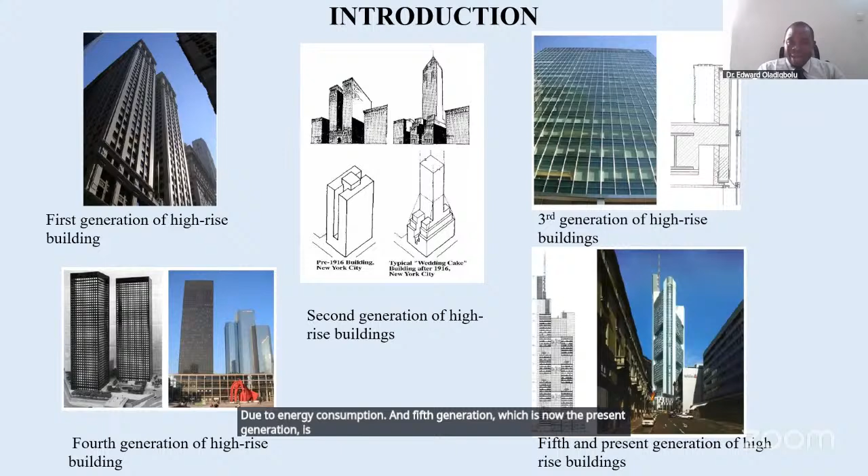Now, building performance robustness - this is very important. We start looking at buildings, analyzing the performance robustness in each building envelope. But why do we study this? To quantify the impact of uncertainty to make informed design decisions, to reduce the gap between predicted performance and operational performance, and to ensure desired performance over the building's lifespan.

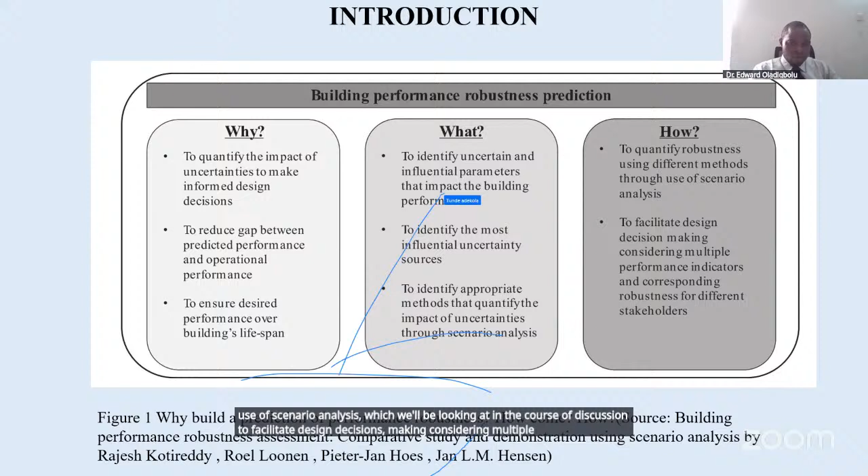But what are we actually studying? To identify uncertain and influential parameters that impact building performance, to identify the most influential uncertainty sources, and to identify appropriate methods that quantify the impact of uncertainties through scenario analysis. Then we look at how to quantify robustness using different methods through scenario analysis, which we'll examine in this discussion, to facilitate design decisions considering multiple performance indicators and corresponding robustness for different stakeholders. This is shown in a comparative study and demonstration using scenario analysis by Rajesh Kotireddy.

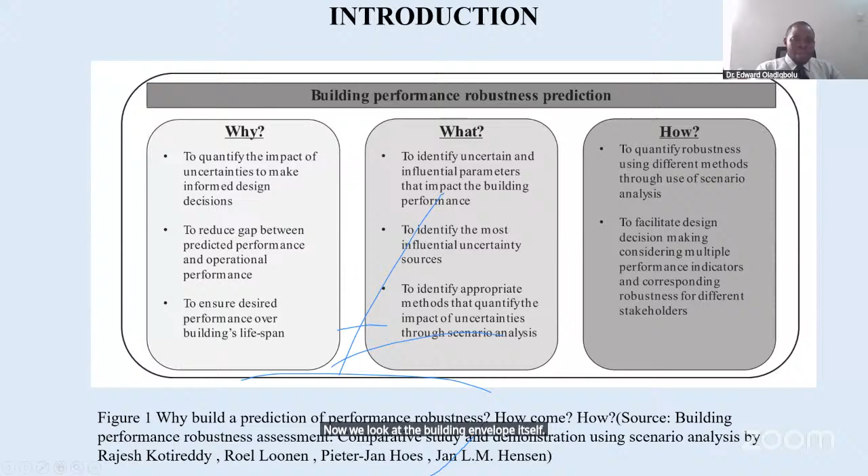Now we look at the building envelope itself. The building envelope includes facades, which interact with the outside world as a social modifier for the microclimate. It isolates spaces from environmental temperature and humidity fluctuation.

So investing in building form and enclosure is a key approach to achieving net zero energy building. These forms of building evolve over generations, and since requirements were relatively simple and change was usually very slow, the design, materials, and construction techniques evolved at a pace dictated by matching needs and available resources.

Now let's look at these five generations and how their relevance has moved from the first to the fifth generation. The first generation is the first batch of tall buildings globally, with the first tall building in 1885. The objectives were mainly compact shape, large volume, high levels, thermal mass facade. Typical energy performance characteristics show low percentage facade transparency, with heating and elevators as the main consumers of energy.

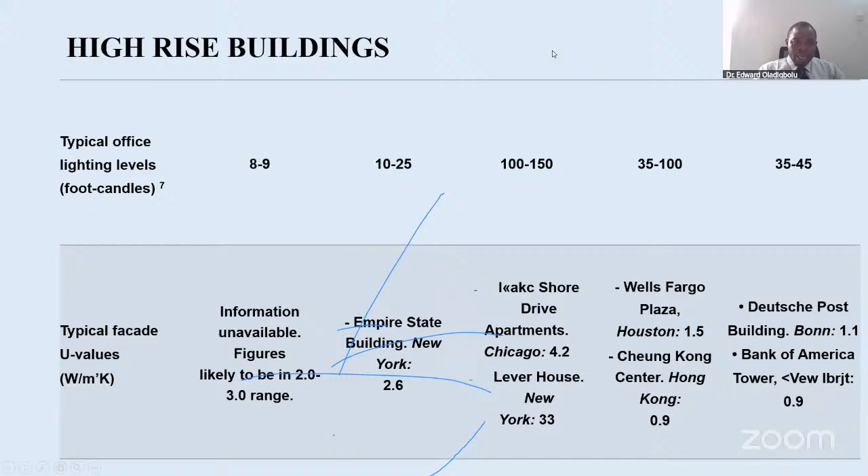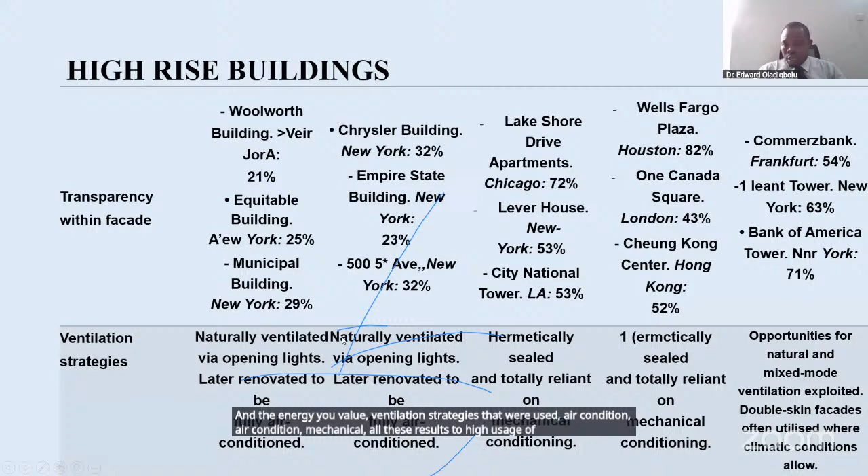You can see the typical office lighting levels for each of those generations, the facade U value, and ventilation strategies used: air conditioning, mechanical systems, all resulting in high usage of energy, mixed mode, exploited double skin facades, and various other conditions.

Now look at high-rise buildings in Nigeria. There are so many high-rise buildings in Nigeria, particularly in Lagos State, but these are the highlighted ones. The Great Nigeria House was built in 1979, which falls into that fourth generation, where energy demand became very critical and buildings are harnessing ways to reduce energy consumption.

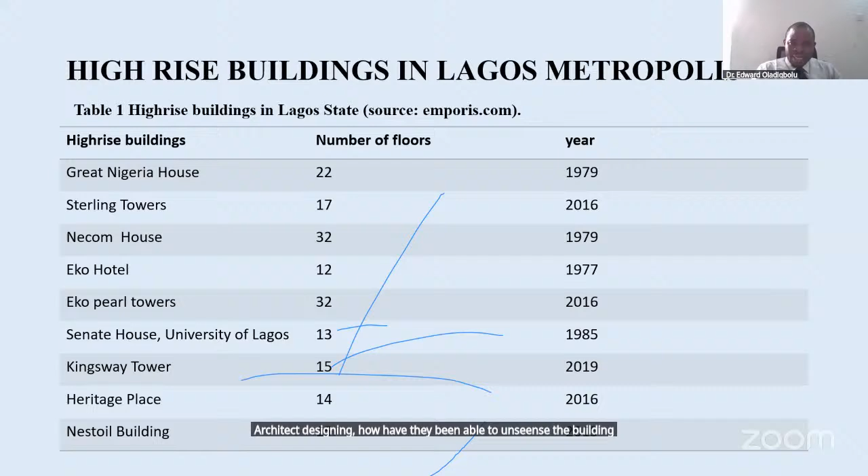How have they been able to harness the building envelope to curb or mitigate the energy demanded by these buildings? So we need to look at the energy flow path in buildings. Before you can harness the energy, you need to understand how energy flows from and around that building.

Now afterwards we look at energy optimization. What are the factors that really affect building services and building energy optimization? This is grouped into the table as shown above, showing the key factors influencing energy consumption in buildings.

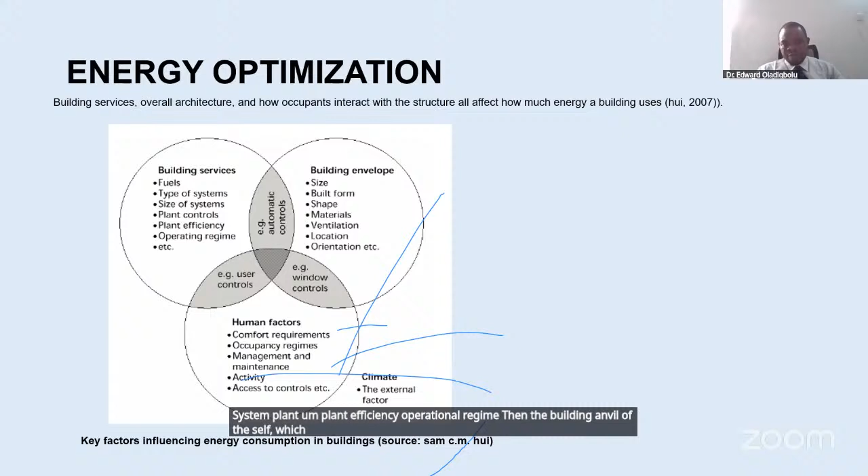These relate to the building services: the fuel, type of system, plant efficiency, operational regime. Then the building envelope itself, which looks at the size, building form, shape, materials, ventilation, location, and orientation.

Then human factors, which include comfort requirements, occupancy regimes, management and maintenance, activity, and access to controls. Then we have the external factors, which is the climate.

So we can see how these connect. The building services connect to the building envelope through automatic controls. The human factors connect to the building services through user controls. The building envelope connects to the human factors through window controls. With this, all connect together as a set to optimize the energy usage in any building.

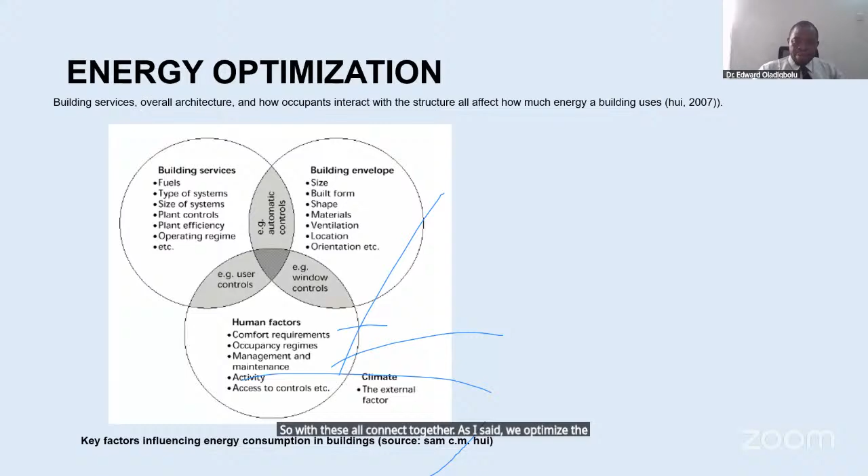Now, Mottahedi examined the key indicators for energy to understand the key variables, which include the system variables, which are on requirement: the lighting, the services, and the internal loads. Then you have the internal load schedules, internal loads, the electrical usage—whatever internally you are using in your building—and your system schedules.

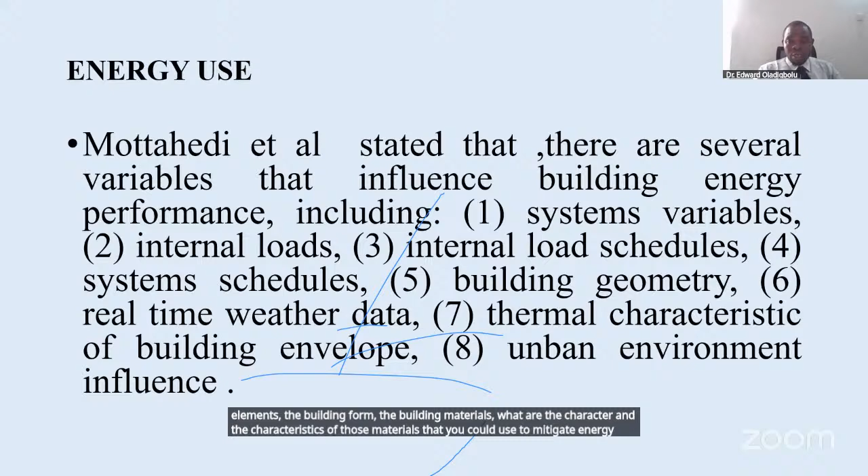You have the building geometry, then your real-time weather data, the weather of that environment, thermal characteristics of the building envelope - that's the characteristics of the elements, the building form, the building materials, and the urban environmental influence. Then we looked at that as being grouped, which has shown the same way.

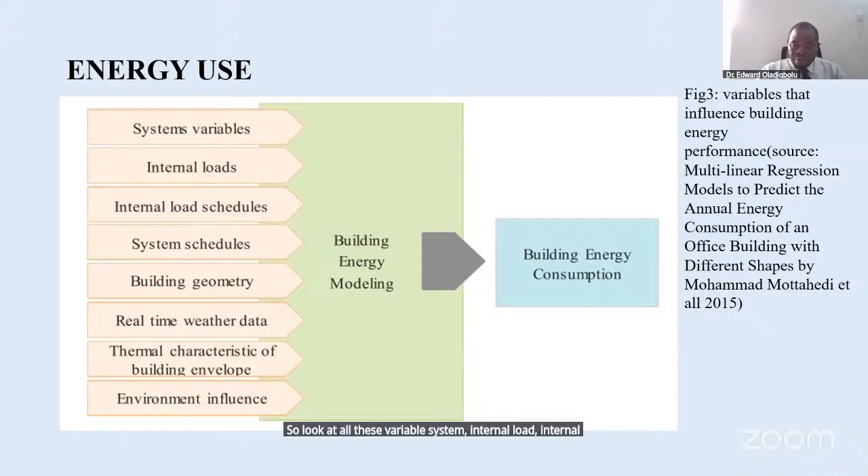So these factors can be used for what we call the shoebox model, that's the building energy modeling, because that is the best way you can identify which of these variables is actually influencing the energy consumption of the building the most. So we look at all the variable systems, internal load schedule, environmental influence, and so on and so forth.

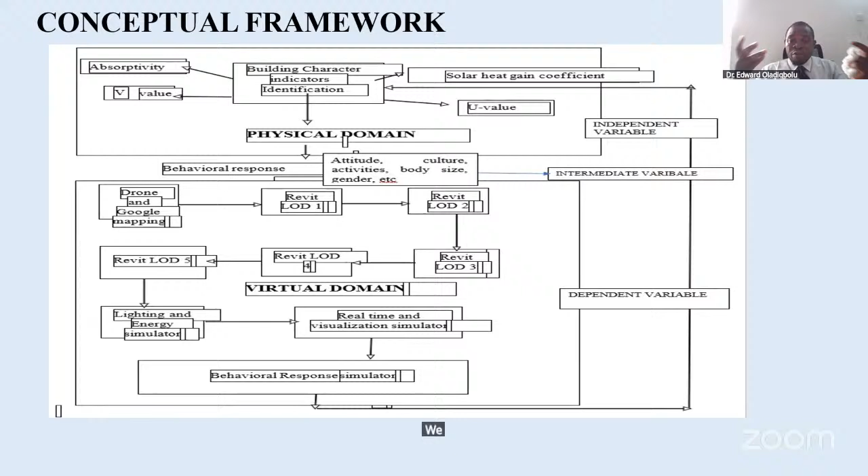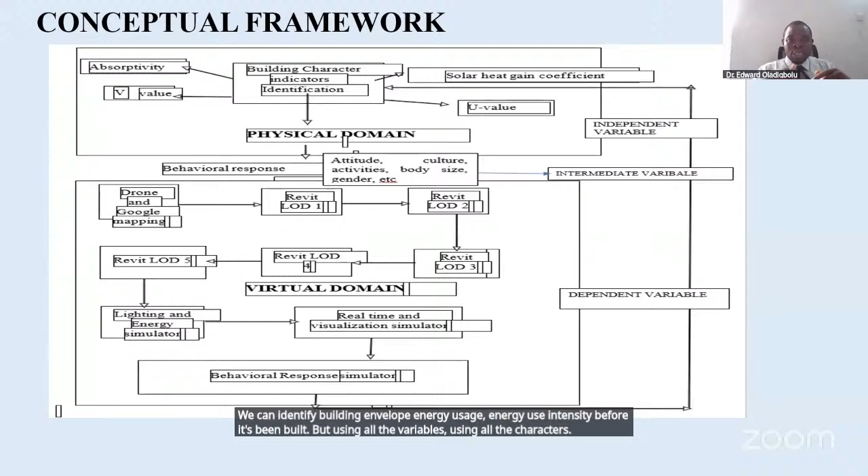So there's a framework arising for mitigating energy usage. In the conceptual framework shown above, we show the relationship between the physical domain and the virtual domain. In this way, we can mitigate energy consumption of any kind of building even before it is built. We can identify building envelope energy usage, energy use intensity before it is being built, using all the variables, all the characters, all the indicators that is being calculated into the building usage.

You can see that using it to measure different conditions, and you can use that to calculate the energy consumption, even identify the bill you are meant to pay for the building. And these practices are noted all over. In Holland, they use passive house to measure, so whatever bill they are bringing must be in conformation to what you're actually using in the building.

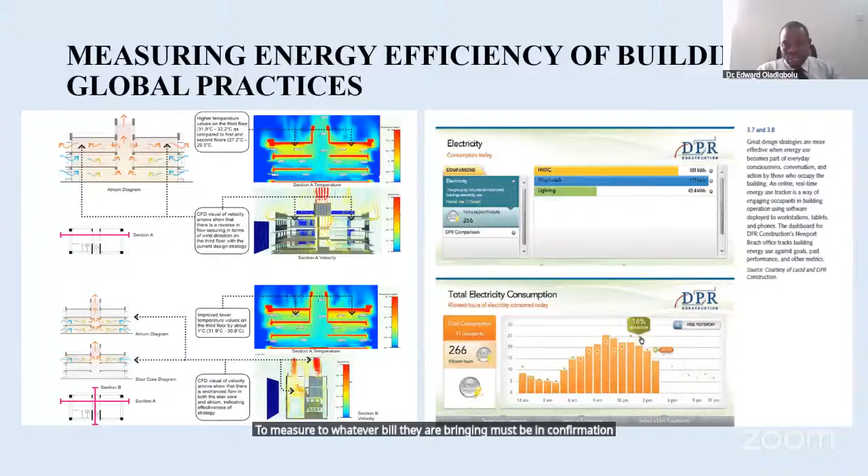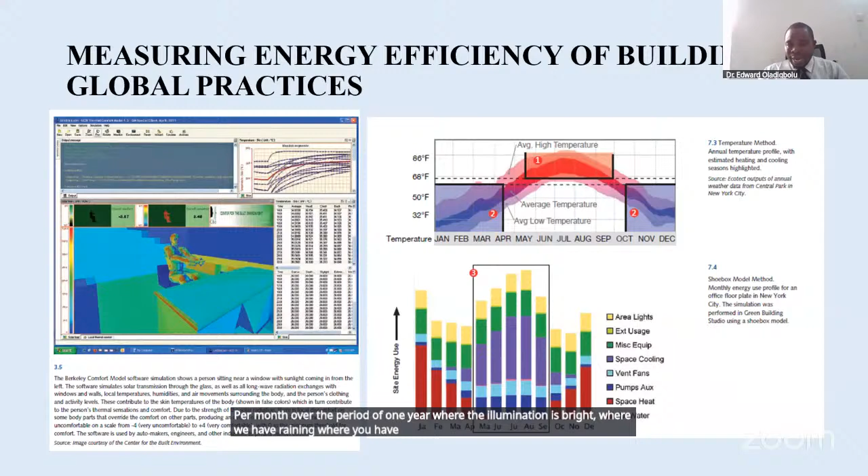You see this for measuring daylight. You have the Ecotect, you can see this Berkeley comfort model simulation. It shows the daylight factor and daylight autonomy through the spaces of several buildings. This shoebox model method shows the energy consumption of each of your spaces per month over the period of one year, where the illumination is bright, where we have raining, where you have daylight - how much energy will you use over that period of time.

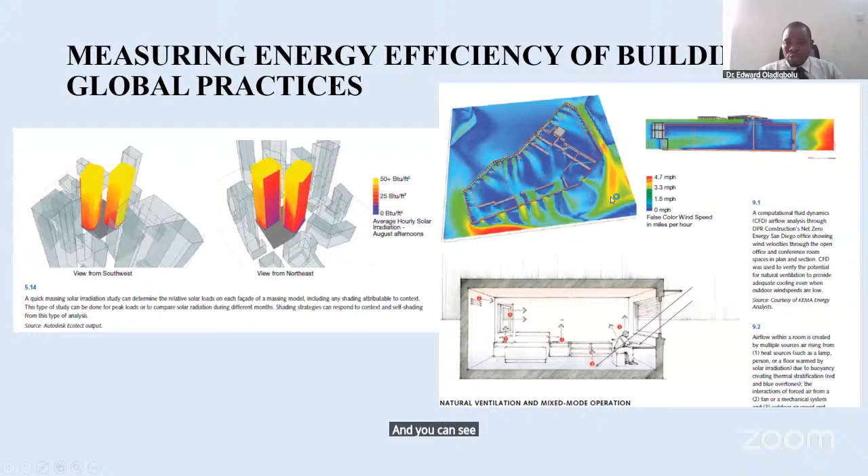So you can see more. This is to show the massing, to show the lighting performance along each of the spaces. And you can see this is simulation CFD showing the airflow within each of those spaces.

Now we have samples here in Nigeria where we calculated the energy consumption in one of the major high-rise buildings in Nigeria. Example here is the Heritage Place, it's a LEED certified building. We calculated the energy usage to see if it meets up the benchmark that has been stipulated for 2030, to meet up the SDG goal, Sustainable Development Goal. This was simulated through Revit and Insight 360.

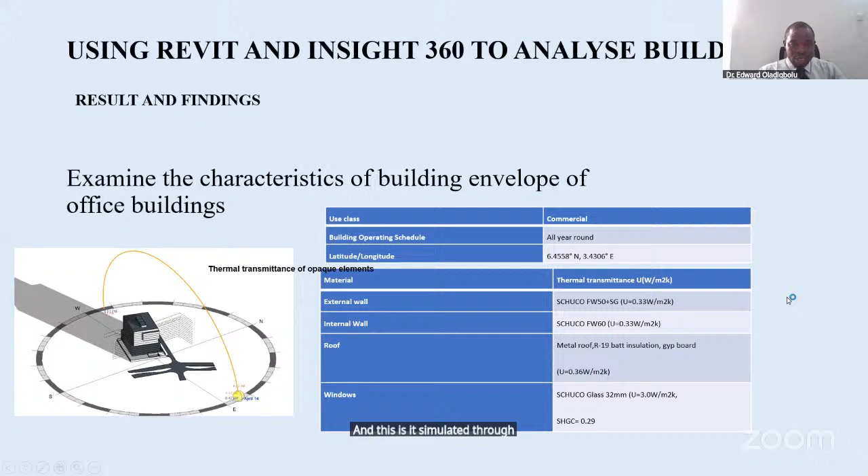And we did the same for Nestoil Building, also a LEED certified building, Heritage Place, King's Tower, and the Churchgate Building. Now these are the energy values gotten from each of that. As much as they were recognized for LEED certification, they still have some adjustments to meet up the benchmark. You can see the Architecture 2030 benchmark there.

The energy consumed after analysis through simulation is 208 kilowatt hour per meter square per year. The energy usage needs to be reduced to 110 kilowatt hour per meter square per year in order to meet up the benchmark stipulated from Architecture 2030. And to meet up ASHRAE 90.1, it must be 171 kilowatt hour per meter square per year.

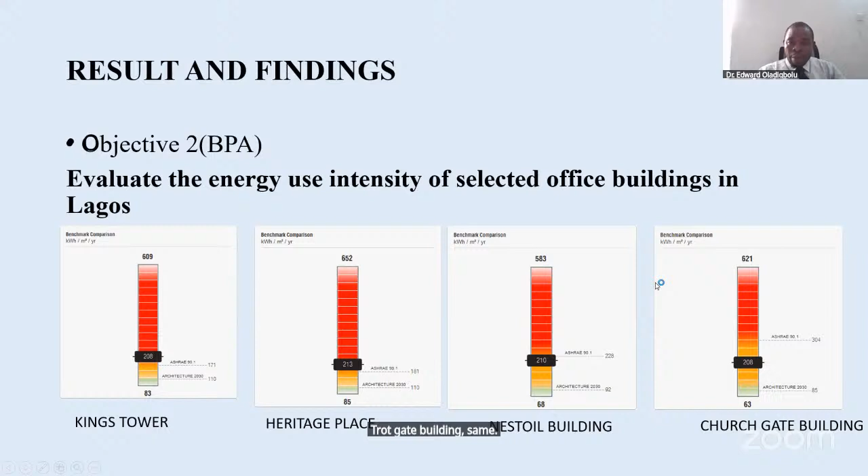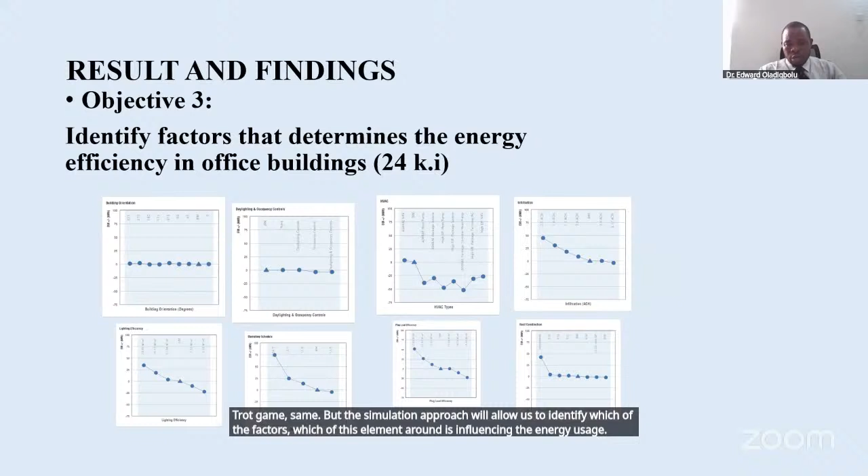And it cuts across - the Nestoil Building meets up the ASHRAE 90.1, Churchgate Building, same. But the simulation approach will allow us to identify which of the factors, which of these elements around, is influencing the energy usage. Because if you look through the typical methods of approval, of checking sustainability, it's just to see the number of windows.

But what is the lighting level? What is the daylight factor? What is the daylight autonomy? These are the things that we are more concerned about in order to achieve adequate lighting in the space, in order to reduce energy consumption.

With this simulation, you'll be able to identify each of the factors, from building orientation. You can see building orientation has no much effect because most of these are open offices with open glazed windows. There's adequate daylight autonomy through each of the spaces.

But the HVAC system, the infiltration through the different materials, is important. The materials used based on their convective and conductive properties affect the heat exchange from outside space to internal space. You can see the lighting efficiency.

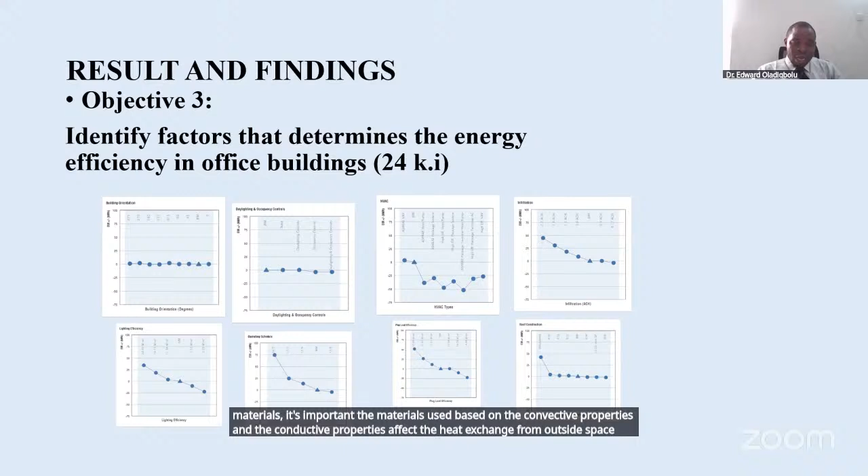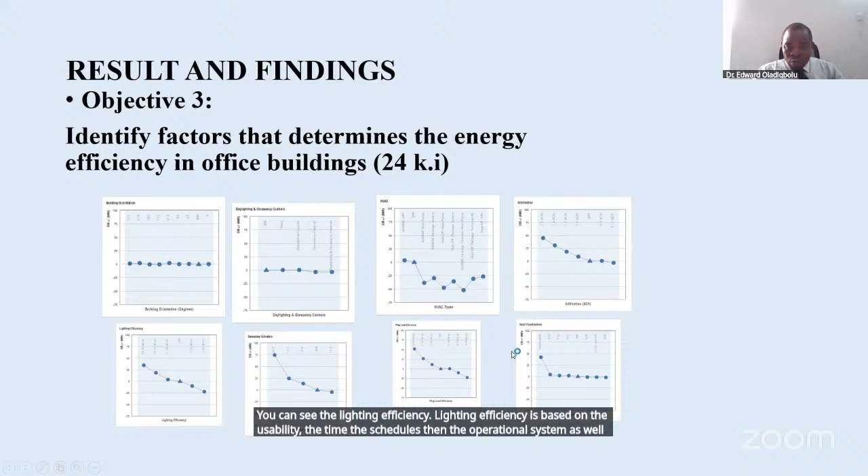Lighting efficiency is based on the usability, the time, the schedules, and the operational system as well. We also look at the roof orientation and roof construction, then the relationship between the building envelope and energy efficiency, looking at each of the facade elements and how they affect energy consumption. Each of them is indicated as shown above.

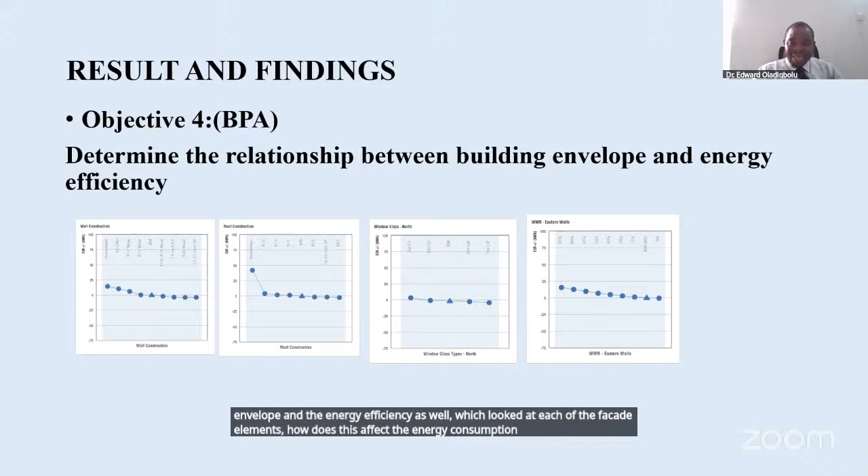Now, this process shows how you can go through the simulation process to achieve an energy efficient building. Firstly, by measuring the building if it has already been constructed, plotting it using GPS mapping to know the latitude and longitude, and allocating it to a weather station.

Then you develop the building information model. The building information model shows all the details plotted accordingly. There are many building information modeling softwares, such as Revit, Vectorworks, SketchUp, ArchiCAD, and so on. From there, you move into building performance analysis, the BPA, where you do the energy mass model, the shoebox modeling.

You have the energy assessment through Insight. There are others: Green Building Studio, Edge, Passive House, Habitat, Energy Plus, and so on.

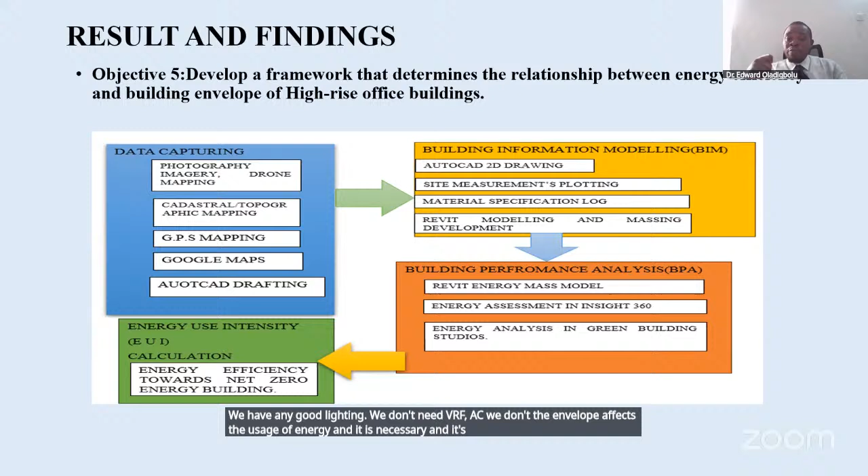From this, you can identify the energy consumption at the end of the day for each building and identify which elements are affecting its energy consumption. So you wouldn't randomly suggest, just by looking at it, that there's adequate ventilation, adequate lighting, or that we don't need VRF AC. The envelope affects energy usage, and it's necessary to identify the elements influencing energy consumption before addressing the mechanical aspect of the building.

In conclusion, energy benchmarking is pivotal to achieving sustainable development. Lagos, as a metropolis, has a high concentration of high-rise buildings, and energy use intensity needs to be minimized to contain global warming and urban heat island effects. Simulation serves as a pivotal method for assessing energy use of large buildings. Building envelope is very imperative in reducing energy use intensity of high-rise buildings, or any building in particular.

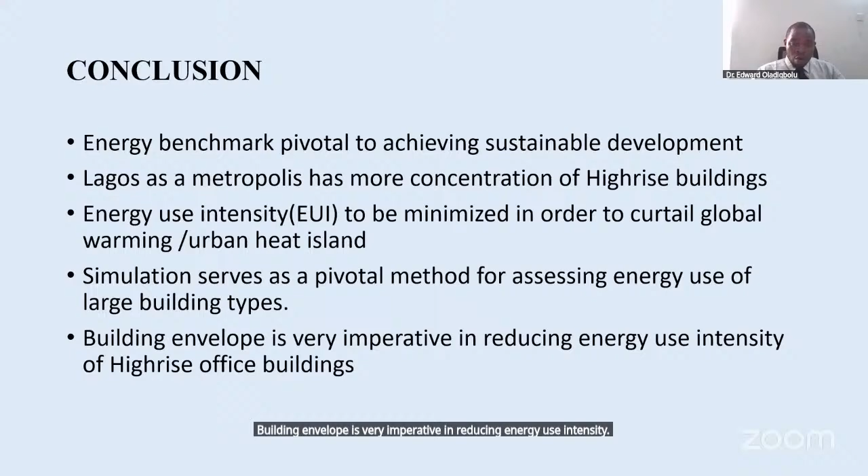So our recommendation: we expect development of energy use intensity per unit area for all buildings in different localities. Globally, buildings now have a statutory energy use intensity benchmark per unit area. We need to develop energy use intensity per unit for each building, depending on the volume and location. Energy use intensity benchmarks need to be developed.

Government intervention in staff training is needed to curb and determine the energy usage of each building. Government should initiate building energy consultants to mitigate excess energy usage. Simulation specialists should be involved in the building process and in the approval process as well.